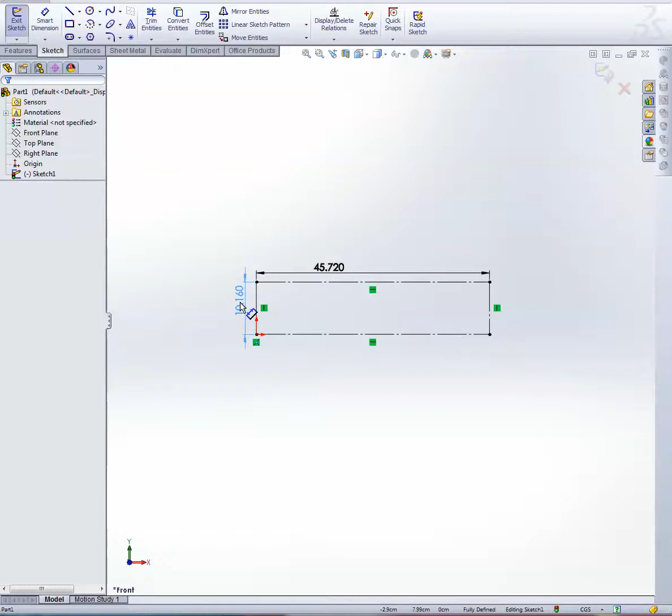And I might move this object so that it's touching my origin, and that's going to help me when I build the next part. So inside of this bounding box, I'm going to go ahead and draw some of the lines that I think I'm going to cut on the bandsaw and the table saw.

So I want to be exploratory in how I'm creating these lines, and perhaps as you create them, you know, if you need to go out of this bounding box at first to get them to be exactly what you want.

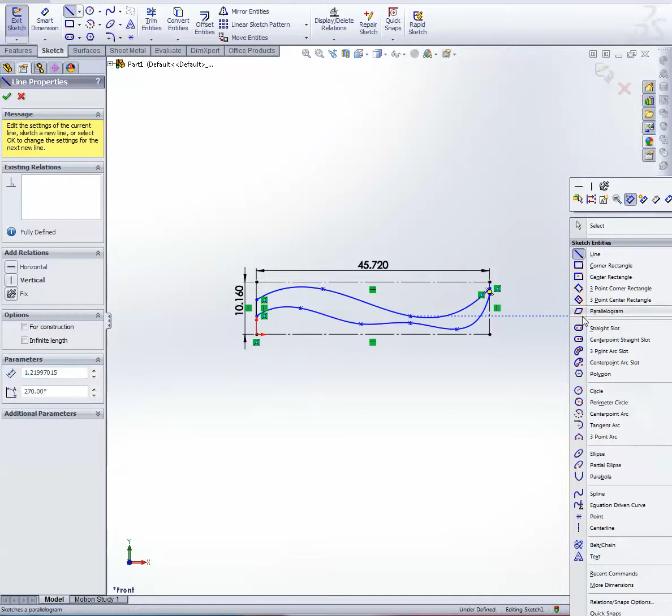Okay, and then I'm going to close these forms up on the end so that I can extrude this object. Okay, so that's my first piece.

And now I'm going to come up to the top plane and do another sketch. So on that top plane, you can start to see how those profiles might cross over each other.

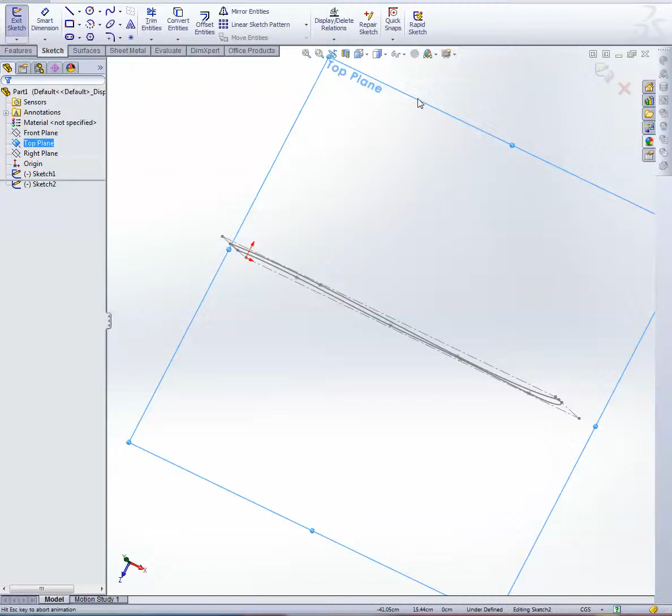So I'm going to start a new sketch on this top plane, and I'll go ahead and get normal to it. And I'm going to draw another bounding box to help myself see that blank that we're using, and I'll get some dimensions on it to make sure that it's correct.

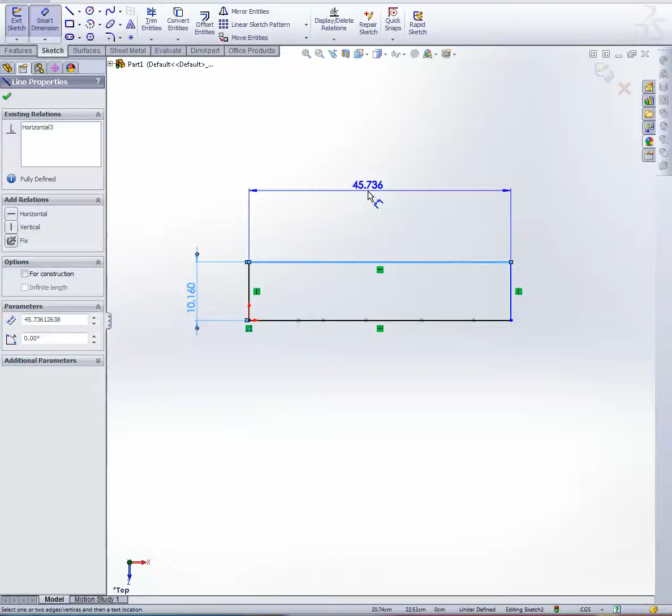And now I'm going to go ahead and start putting in whatever the splines from my top view are going to look like. Got one too many on there.

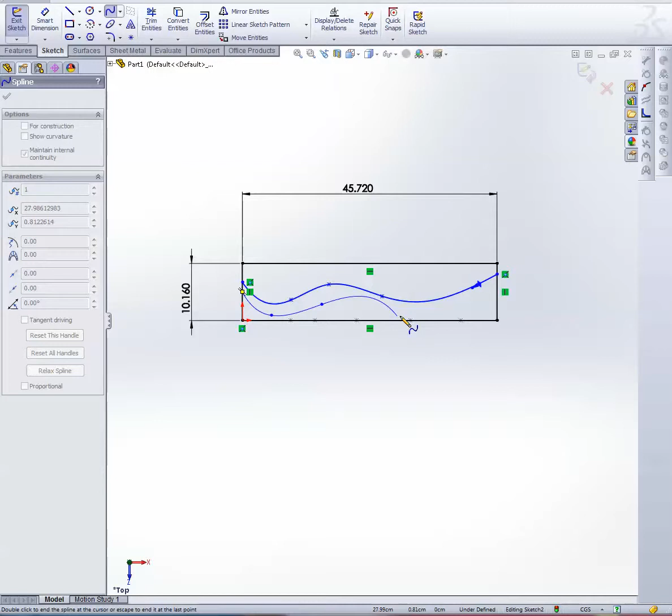Okay, I'm going to put in that bottom spline, and let's go ahead and cap it off on the ends.

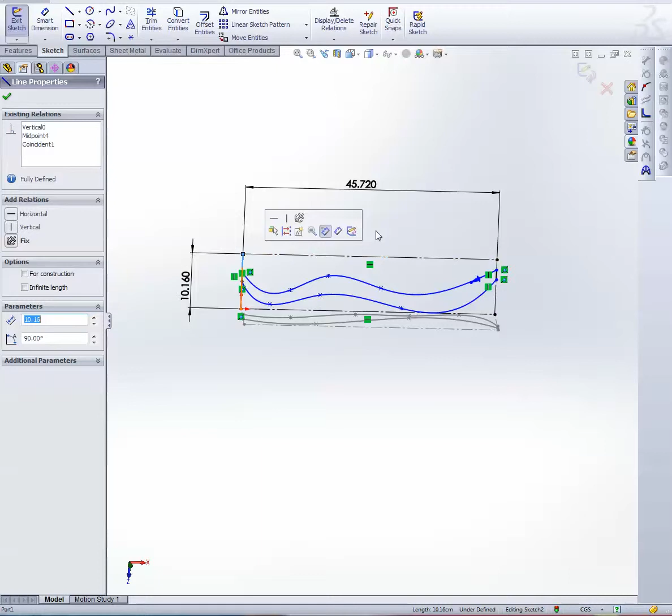And so now I have that, and I think I forgot to turn my box into construction geometry, and that's going to be important so it doesn't interfere with my blend.

So now I have these two forms, and as I'm looking at them, I'm not totally happy with the fairness of the curve, but that's something that I can continue to change as I play with it. So let's go ahead and see how we might be able to use both of these.

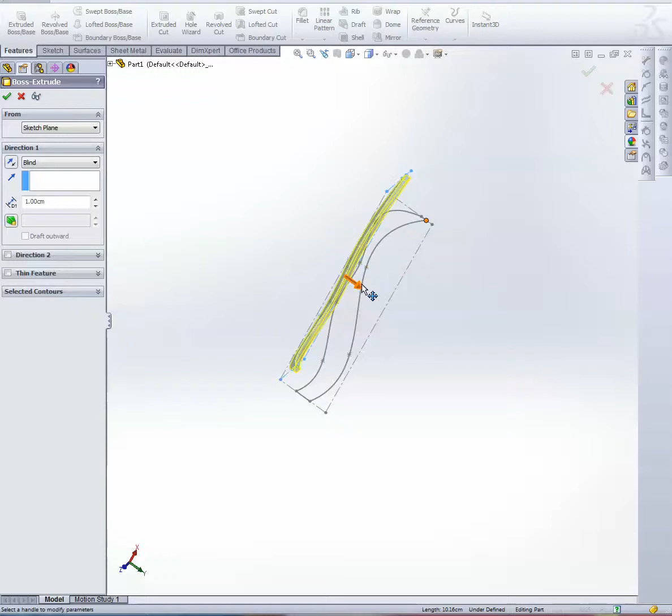So the first thing I'm going to do is extrude just one of them, and I'm going to pull that point out. I think I accidentally changed that sketch, so I'll get it back into shape.

And I want this to come out farther than the other form, and I'll say yes to this. And so you can see how that object would be extruded in that direction.

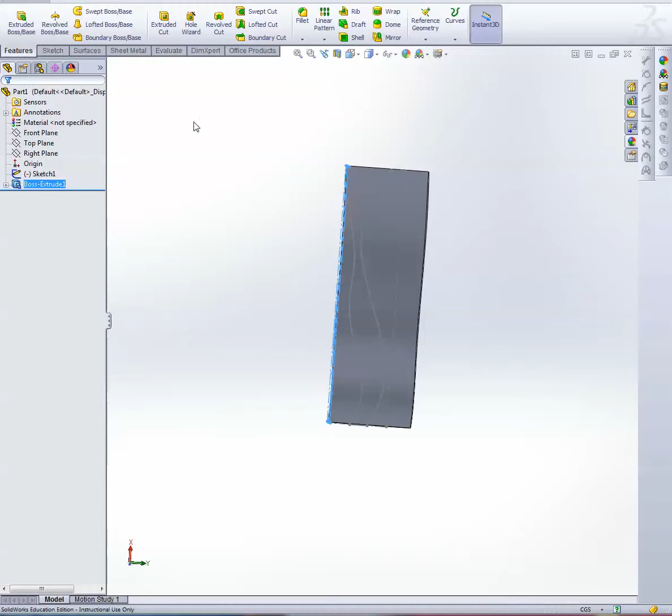And then I'm going to come back and use this other sketch and also make a boss base out of it. Let me change its direction so it's going all the way through that object.

And at this point I'm going to unmerge the results because I want the computer to see these as two separate objects. So I'm going to stop them there, and from this I am going to overlap them.

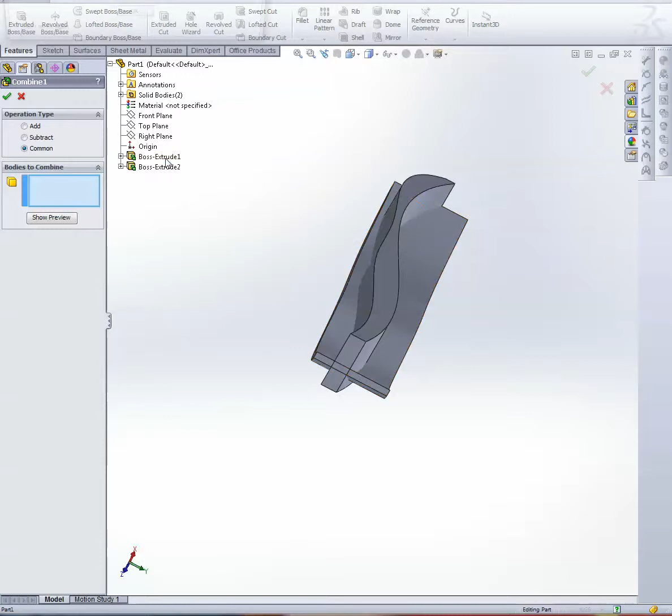So I'm not sure that you can see this on the top of this video, but if I pop down the insert menu and come to features and use combine, what I'm going to do is find the common relationship between these two bodies. So you can see why it would be important to have them not merge.

So those are the two bodies that I want to connect, and what I want to do is see the overlap between them. And so that would be my solid flow form based on the two cuts that I had made.